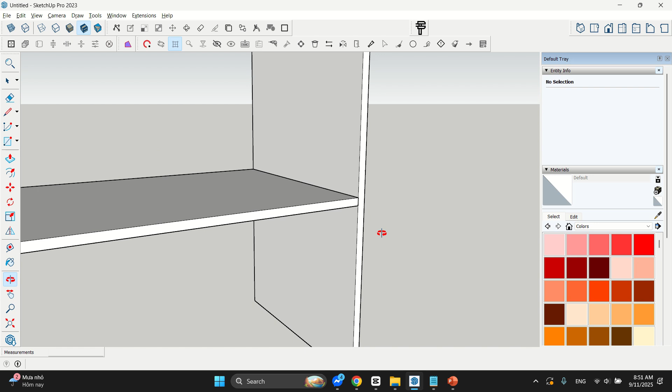For example, here you will create a hook joint between two panels. Simply select plastic lock and click the two panels you want to connect. Here's a simulation of the hook joint. The joint will be generated on the surface you click. For instance, if you click the bottom face, the bottom side will receive the joint. This helps minimize two-side machining.

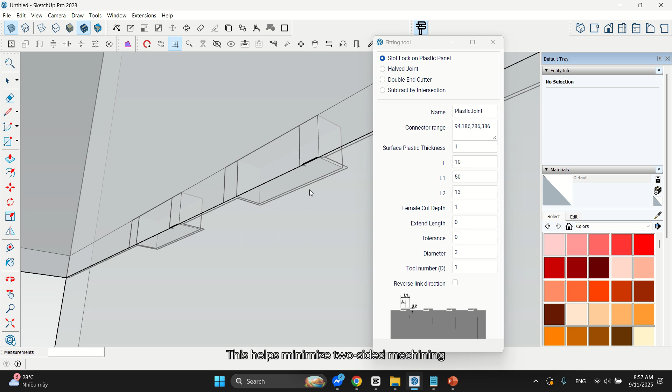Now, let's go through the parameters of the hook joint. Connector range: the distance from the panel edge to the inner edge of the mortise on the female panel. As shown here, range 1 is 94, range 2 is 186. Here's a diagram for clarity. L is the hook length, L1 the joint length, and L2 is the joint depth.

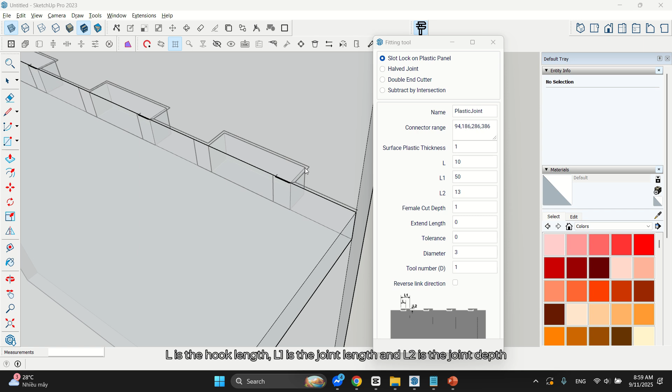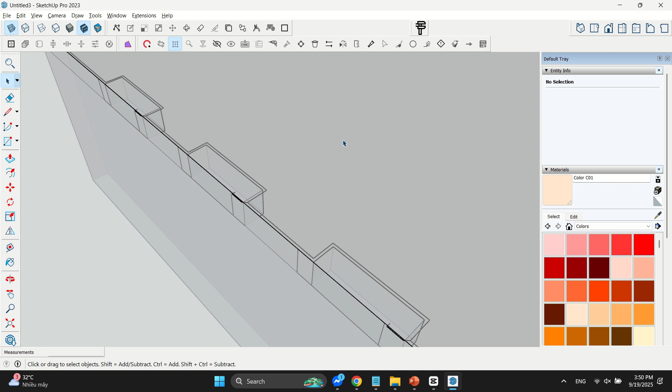Extend length and tolerance are tolerance values applied to the mortise cut, making it easier to assemble the joint. If you want to reverse, check this option and recreate the link. To make the correct hook direction from back to front, in order to ensure the panels fit together correctly during assembly without errors, please add labels to the panels.

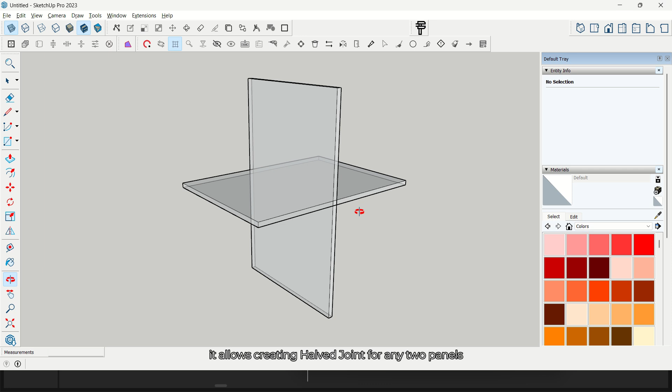Next is a halved joint. Previously, OneClick only supported predefined halved joint patterns from libraries. Now, it allows creating a halved joint for any two panels. Just select the function and the two panels. Done. Here, you can adjust the parameters as needed. Tool diameter and tool number depend on the actual router bit you are using.

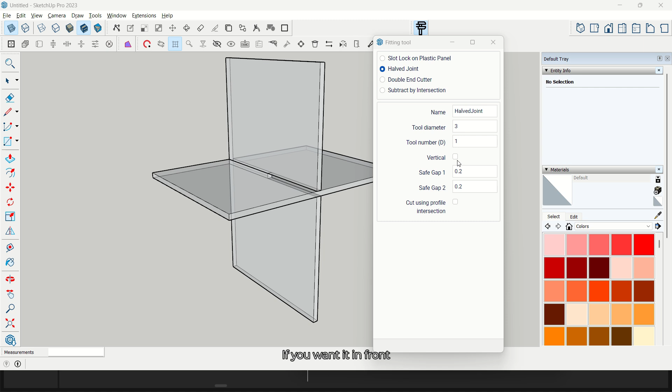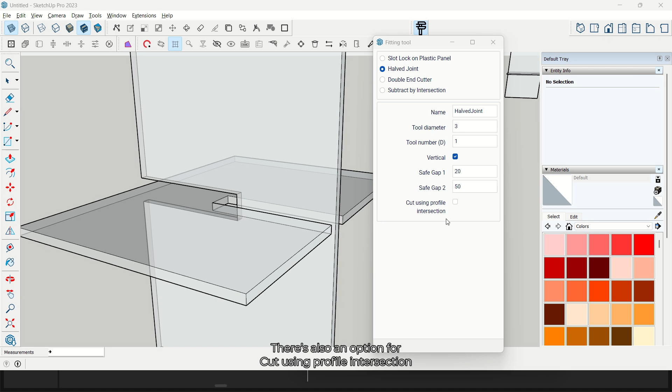By default, OneClick positions the vertical one at the back. If you want it in front, just check this box and regenerate the joint. As you can see, the vertical part has now moved forward. Increase safe gap 1 to widen the mortise. Increase gap 2 to deepen the mortise cut, often used for corner clearing. There is also an option for cut using profile intersection.

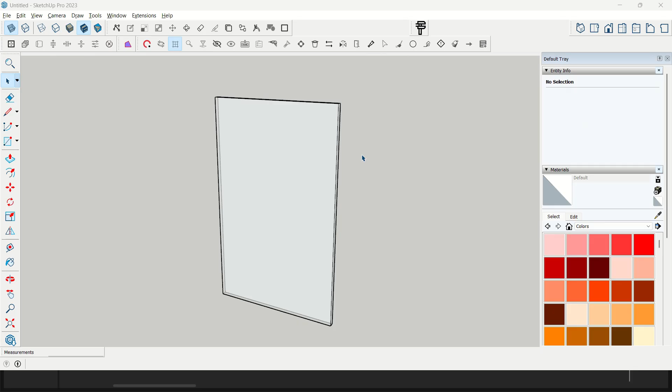To explain this clearly, let's first look at the double end cutter feature. Normally, for plastic parts, the panel width equals the stock width, so operators only need to cut both ends without cutting the entire perimeter. To achieve this, we use double end cutter. For example, with this panel, select the tool, adjust parameters as needed. Tool diameter and number should match your actual tooling.

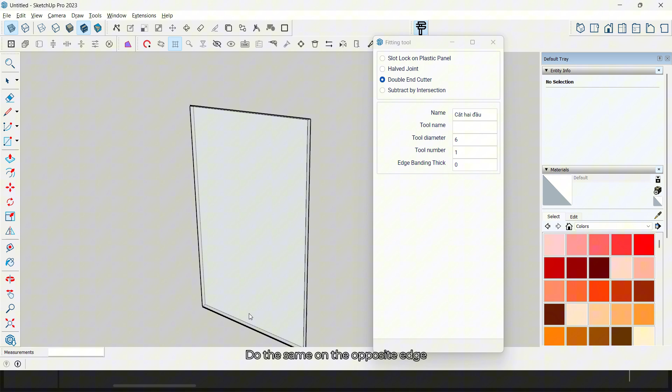Then click twice near the edge you want to cut. The first click shows a red line. The second click confirms it. The line turns black. Do the same on the opposite edge. Note, the black cut line must be on the same plane as the panel, and both black lines must be on the same surface. If they are on different surfaces, machining will run on two sides. If you want to subtract the thickness of edge banding, enter the value here.

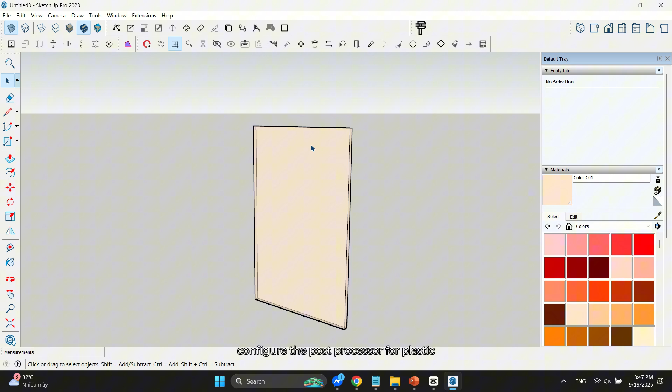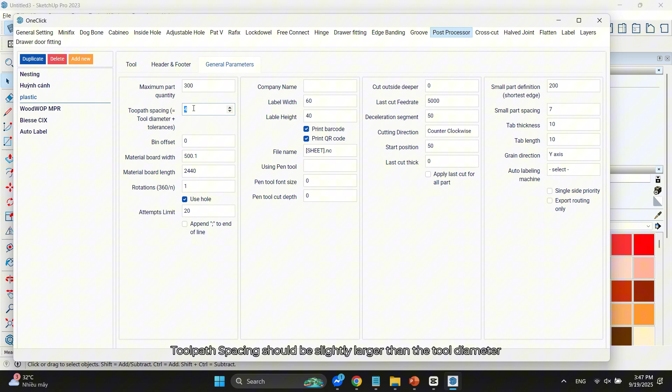Next, configure the post-processor for plastic. Go to Setting. In Post-Processor, select Plastic. In the Tool section, accurately enter the tool diameter. In the header and footer, set the Z0 position to machine bed. In the general parameters, tool path spacing should be slightly larger than the tool diameter. For example, with this tool, set the gap to 4. Keep the bin offset at 0.

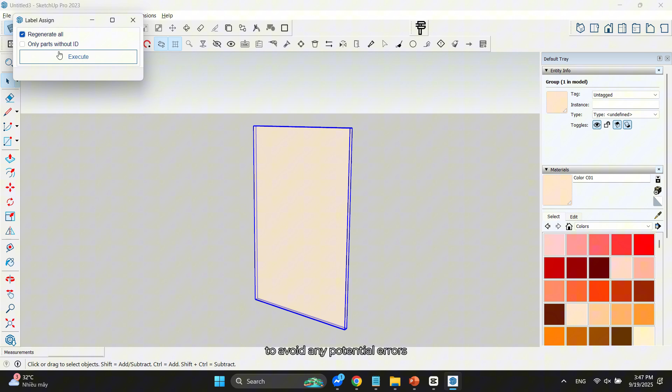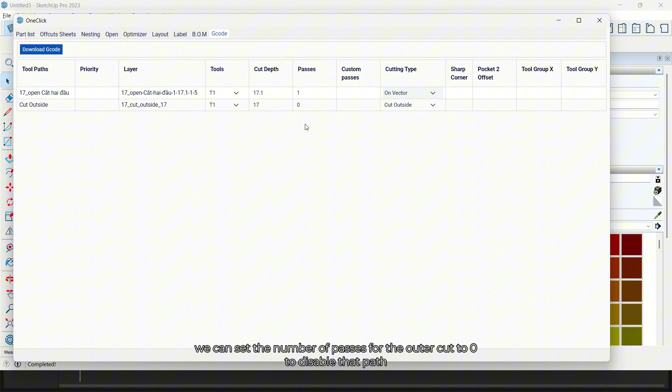In this case, we can set the number of passes for the outer cut to 0 to disable the path, leaving only the custom cut active. When simulating in Simco, you will see that the perimeter cut does not plunge. Only the two end cuts are executed. This keeps the side edges intact.

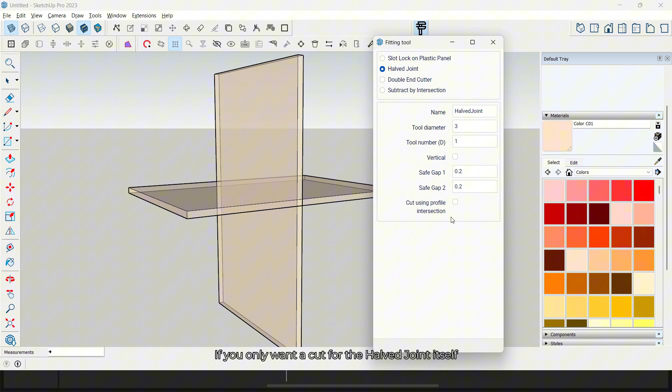Back to Halved Joint with cut using profile intersection. If you only want to cut the Halved Joint itself without a perimeter cut, check this option. And remember to set the number of passes for the outer cut to 0 before generating the code. The simple simulation will show only the Halved Joint cut being executed.

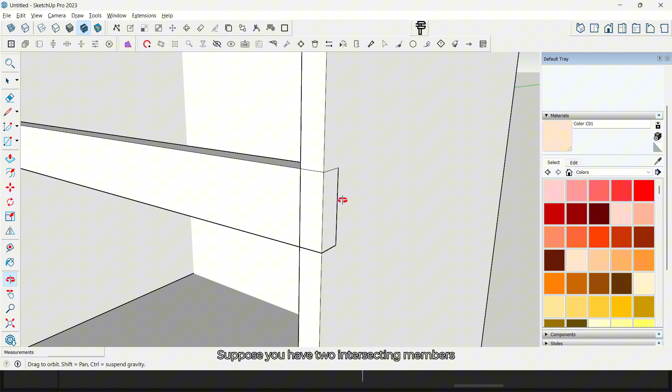Finally, subtract by intersection. Suppose you have two intersecting members, and you need to notch one panel to fit a cross piece. Because the router bits have a radius, cutting this path leaves rounded corners. The operator would normally have to chisel or overcut the mortise to fit the cross member. OneClick now provides a corner relief hole option.

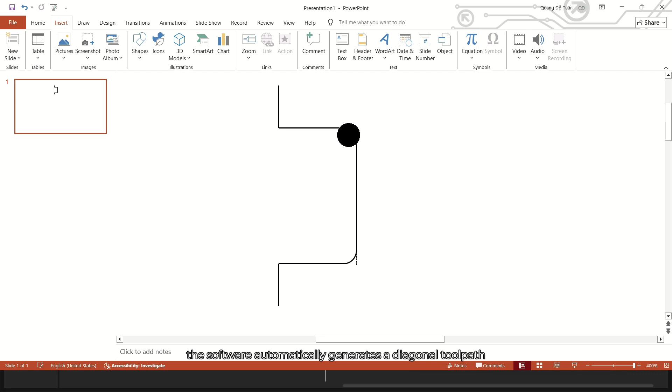When checked, the software automatically generates a diagonal toolpath to clear the corner radius right here. This eliminates the need for manual chiseling. If there are multiple overlapping panels, use the extra cut length option. For the outer panel, uncheck these two boxes and create the notch.

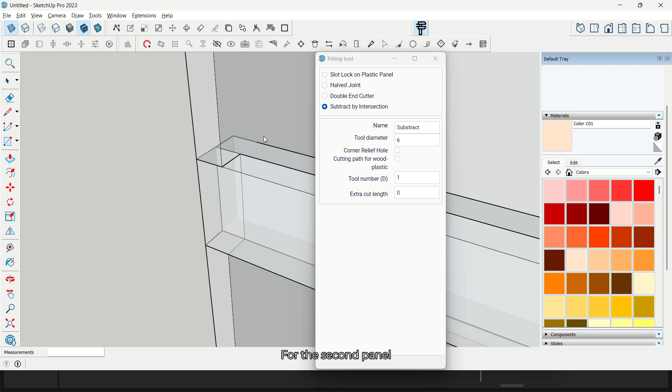For the second panel, recheck the boxes and enter the outer panel thickness, for example, 17. Click on the panel, and now you will have a toolpath cutting from the outer face through to this depth. These are the 4 new features for plastic panels in OneClick.